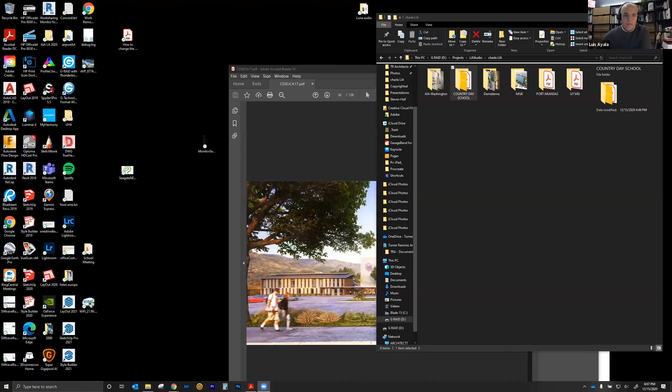Working in Paraguay as an architect is a lot different. In some ways, it's easier than working as an architect here. You have to be a lot more creative. And in other ways, for instance, getting paid is extremely difficult. Nobody wants to pay. That's something that is very wrong in South America, that they don't want to pay for professional services. So there are pros and cons. If I share my screen, I'm going to show you some of the projects to show the difference. Hopefully you can see my screen now, right?

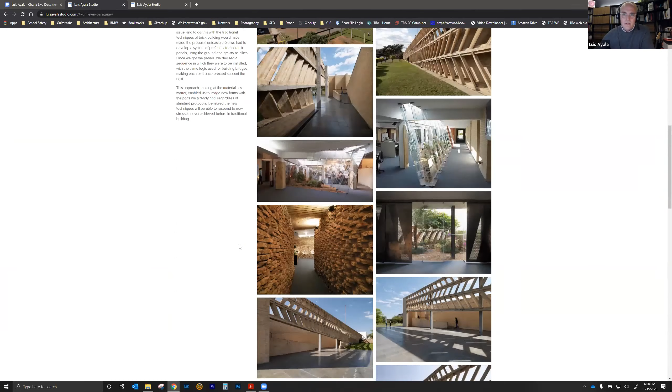Can you? So for instance, this is a project, and I want to start emphasizing that architecture is a work that you do with a lot of people, unless it's a very small project and you can do it by yourself. I have always been lucky to be working with excellent teams all my life. In this case, it was Gabinete de Arquitectura with Solano Benitez, Alberto Marinoni, and a great team that we had. This was a Unilever headquarters in Villa Elisa, Paraguay, a competition that we won.

But I want to show you some of the things that we went through. The project was about creating a brise-soleil, to create shadow for an existing structure. And this is Solano, and this is me when I had hair back in the days. And you see that these panels were broken. We were trying to create these panels with bricks that were very thin and were collapsing. And then we sat on that bench, Solano, Alberto, and I, trying to figure out how we're going to fix this problem that we created ourselves.

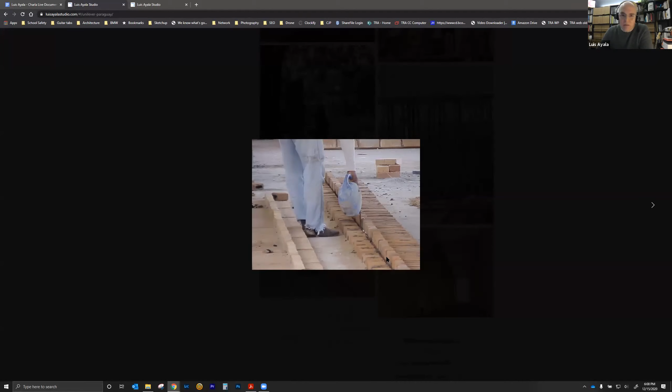So we came up with a simple solution, which is just turning one brick upside down to create a rib on this panel, so they will withstand some weight when we apply forces to them. So these are the workers, and that understanding that Paraguay has a very unique labor force, meaning we have a lot of labor and materials are expensive.

So materials are expensive and labor is very economical, so we can do projects using a lot of labor. And you can check these projects in more detail later on my website, Luis Ayala Studio. But I wanted to show what we did with these panels.

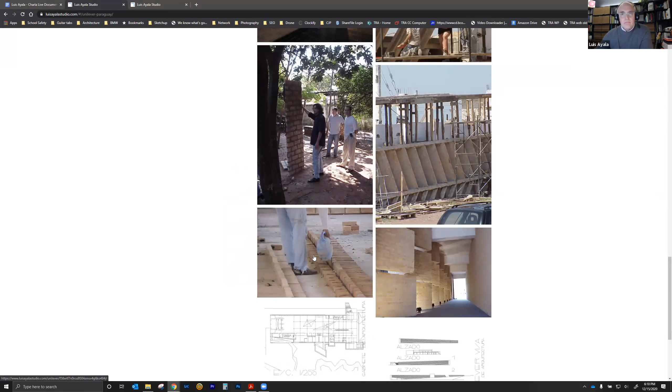If I show the elevation, you see that those panels were supporting themselves. Also, they were load bearing despite the very thin width of that panel. So what I'm trying to say is, try to make this in the US. It's impossible. So that flexibility you have in Paraguay, where the client said this has never been done. And we said, well, we'll take full responsibility for this. And if it fails, it's on us, right? So that's the main difference.

You know how to design in the States. It's different in the sense that you have some systems that are already there. And if you're trying to create a wall, you start thinking of these systems. In Paraguay, we design everything from the systems themselves, right? So that's something I miss of Paraguay, but there are things that I value more here.

And what is the name of this project? I'm sorry, I missed it at the beginning. Unilever headquarters. Unilever is a Dutch company that represents a lot of brands. Yeah. Oh, that's pretty cool that you can just design your own systems, design everything, kind of total design in architecture.

Oh, I remember this is going to be very informal. So we thought about making a script, and I said, nah, let's go with it.

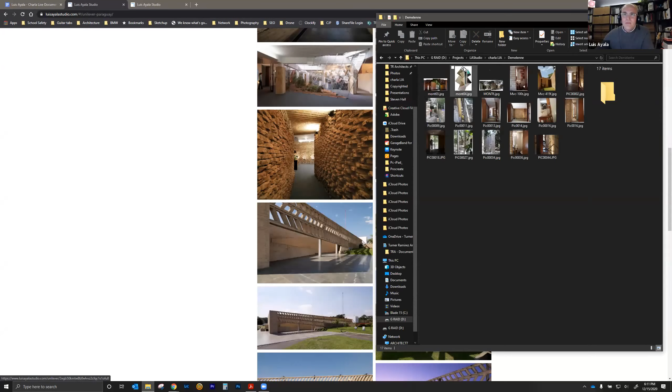So for instance, this is another house, when we were trying to play with it, and sorry, the photos are very small because it was the 90s and the digital cameras were 640 by 480. So this is the exterior wall of a house in Areguá, and Areguá is 50 kilometers away from Asunción, the capital. So we didn't have enough money to build a house.

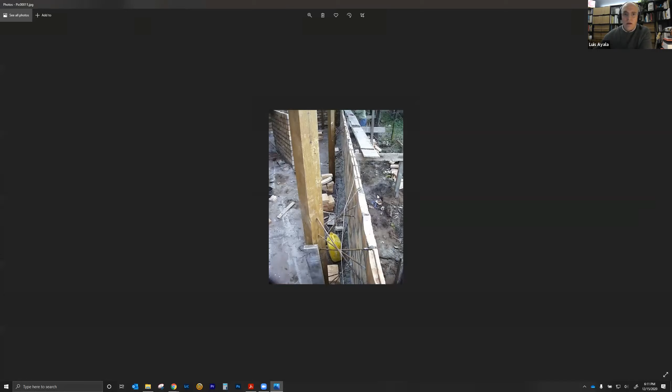So we thought if we simplify the walls and make them thinner and use a third of the material, because when you turn the brick upside down like this, you're using a lot less material, you can make it economical, right? But then you were presented with problems like, okay, a wall this thin is not going to stand by itself. So we came up with the idea of having these wood columns with some rebars tying down the walls. And this is how the house looks at the end.

Of course, when you think of walls that are single wide and this thin, all the heat that they receive, they transmit inside. So we were able to do it because it was in a very heavily wooded area where the trees were providing the shade that we needed for these walls. So, examples like this.

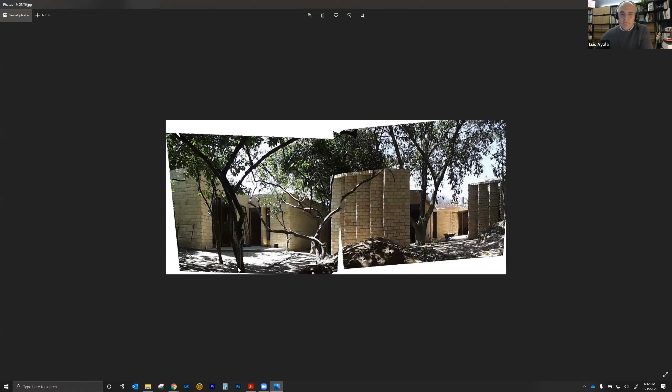When I was working over there, I enjoyed the experimentation, that we were able to experiment doing things that were never done, and we were the builders too. So that's something that is also different, it's always a design-build practice. You come up with these crazy ideas and then you have to build it. So it's interesting. And it looks like it's all passive design. Yeah.

Well, thank you for sharing those beautiful projects with us. Thank you, Ulises. Yeah, so on to the next question. Some of our attendees are students, and we'd like to know what has been your most useful or favorite skill that you learned during your architectural education.

Ooh, nice, good question. I'm thinking of several things. The first one that came to mind was, if I show you the projects that I did in first year and second year of architecture, they sucked. They were horrible, because you learn by doing it, right? And I remember the professors that I had in the Catholic University, but more specifically, I remember my friend.

We went to elementary, middle, high school together, and then we went to architecture school, Sergio Rogero. So Sergio taught me how to think in architecture. We started when we tried to do one of my projects, and he comes from a family of architects, so he told me how they work on projects and how to structure your ideas, to simplify the problem in order to be able to find a solution to design a building.

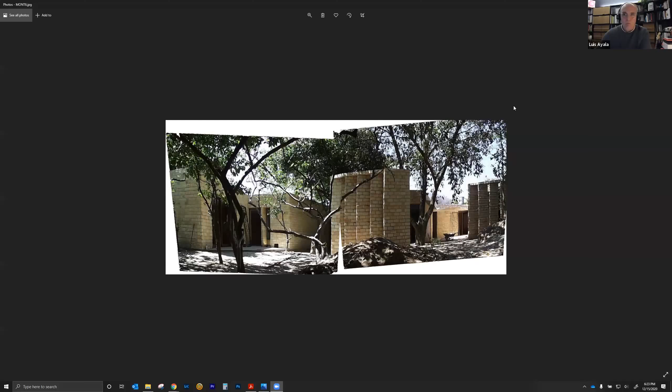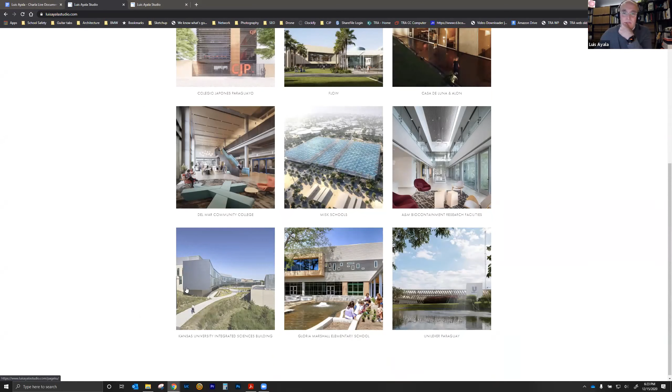Speaking about your work, what was your experience like designing a project that was recognized and exhibited by the Emerging Voices and the AIA National Emerging Professionals in Washington? Okay, I'll share my screen again. This is something I have to thank SHW Group for. When I joined them, we had the opportunity of doing this project. And I remember vividly my friend Jody got this project from this client, Jody Sergi. She was Jody Henry at that time.

The client was thinking outside the box, and I think we were the right firm to do that. It was an elementary school, this district in Spring, and they used to do elementary schools in one story. The first goal was, let's make it a two-story building, and they were cool with that. They wanted a green building when green wasn't in vogue yet. LEED was starting. This was 2009, I think. No, we started building in 2008 when the economy went down. So the opportunity was huge.

And the design director I was working with, Tracy Ike, we worked together really well. I miss that guy so much. I had the opportunity of thinking outside the box, and they wanted that out of me, to bring that South American way of designing to this project. It was very well received. It won the first AIA Design Award for our firm. The same year, it won the TASA Caudill Award, the education award in Texas, and then the Green School Award by the USGBC. So it was a very cool project.

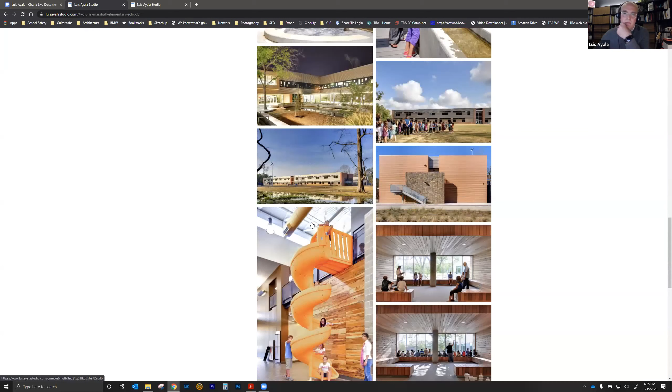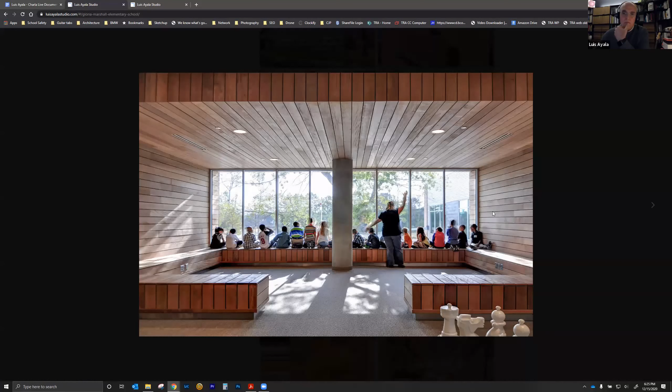I mean, you can go and look at it. It's a beautiful project. What I'm most proud of is that one of the problems we had in that district was low attendance. It's a poor neighborhood, and kids live with their parents, but their parents are usually working, and they leave their children to go to school by themselves, and sometimes they don't want to go and they don't show up. So the attendance was very low in the district.

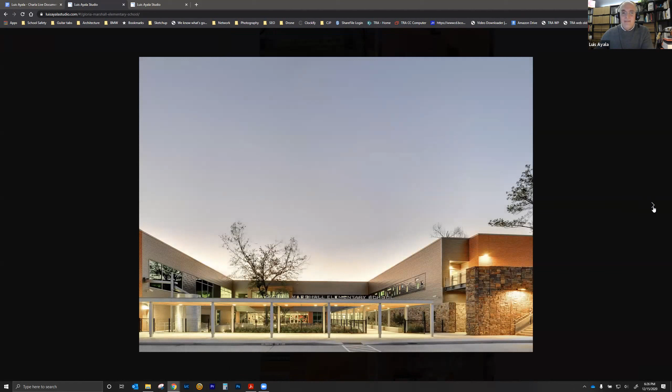And when we did this building, because of how it looks and because they loved being there, the attendance was 100%. So that for us was a great success. I remember with SHW Group, we used to practice the first day of school. We would go to the school and open the doors to the students and show them their building the first time they were introduced to it. And it was very emotional because some of them were asking, is this for me? They couldn't believe it. And for us architects, that is the best reward you can get, that your clients love your work.

So when that building won so many recognitions and awards, there was an opportunity with Architecture Houston to present at what was the Young Architect Forum. They pushed me to present there and show my work, and it was selected among the people that presented. And then without me knowing, AIA Houston submitted this to AIA National, and it was recognized there in Washington.

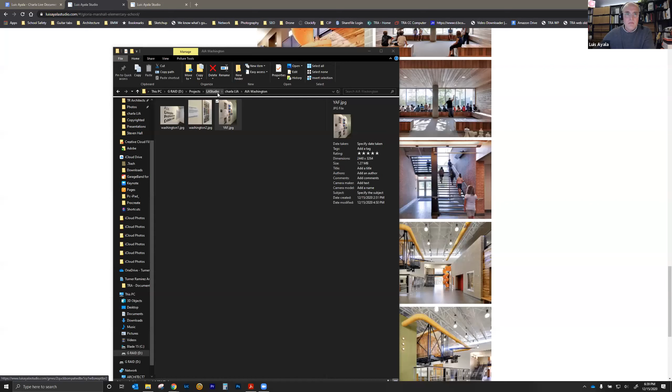So, what advice would you give to someone pursuing a career in sustainable design? Oh, nice. You know what I learned, Ulises, is that I was not an expert in sustainable architecture. Although when I did that house, I'm going to start sharing my screen again, Casa de Luna, that was one of my first projects in Paraguay, and that was even before LEED. So if I go back here. Where is Casa de Luna here?

And it's called Casa de Luna y Alon because my daughter is Luna and my son is Alon. And so we did this house for them actually. So my role here was architect, owner's husband. That is very important to note. I don't know if my wife ever realized that this is my role in this project.

For instance, in this case, think about this, Ulises. When you go to the beach and you're trying to protect yourself from the sun, you use an umbrella, right? And you keep moving the umbrella to shelter you and give you shade. And it's the same case with our buildings. If we just expose them and leave them there naked trying to deal with the sun, then they're not going to be comfortable buildings to live in, and the energy bill is going to be crazy, because that's what we did in the 70s and 80s, because the energy was so cheap,

This is a project I did with Gensler, and last time it won an award in AIA Los Angeles. So we were competing. It was a private competition for the Prince of Saudi Arabia, and his wife runs a school, the Misk School, and Misk in Arabic means the dew, Rocío. I think in English it is dew. Like mist? Mist, exactly.

So what I wanted to show you of this project is the tools that we have to work with now to think about sustainable design. So let me get there.

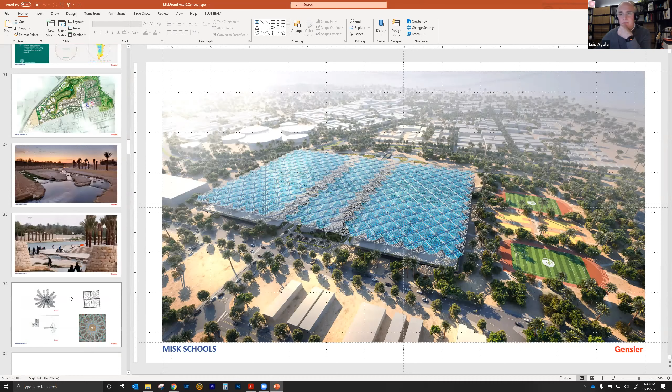Okay, so how are we with time? I think we have to be wrapping up.

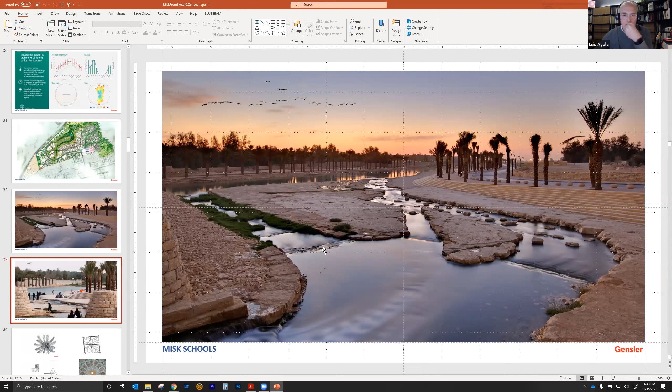But this is in Riyadh, this is a wadi, and wadi means a little river. And a lot of people go here because the water brings the temperature down. And the only tree that grows in this area are these date palms. So when I started with the concept, and I promise I will get to the sustainable question here.

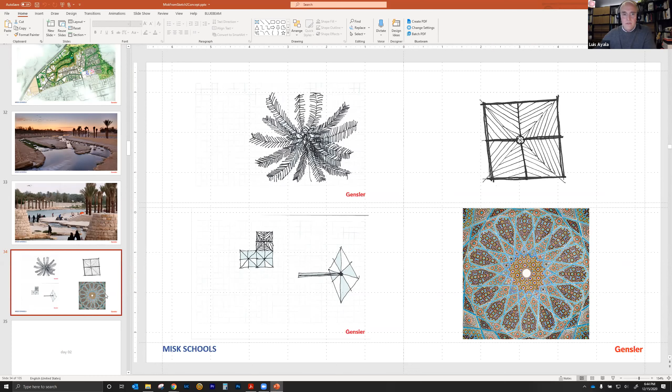When I started with the concept, I thought, if what they are using here to shade themselves are date palms, they don't provide a lot of shade. But if you combine these leaves, if you multiply them, now they create some shade. So I started thinking of how can I create a canopy using the date palm as a pattern, and using also these Arabic architecture patterns that they have a lot.

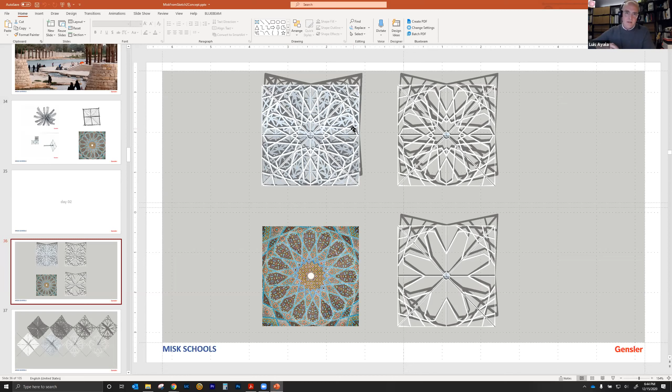So this is an exercise of modeling fast in SketchUp, because it was a competition, a paid competition, but they gave us 15 days to come up with a solution for the school. Oh, wow. So I started playing with these ideas of the date palm that I rotated in the same axis, trying to create more shadows, and then to see the density of these shading devices,

how they were going to shade the spaces. Then this is a scale of a person. When working in a desert environment, to create shade is everything. So we were going to multiply this by having thousands of these date palm structures.

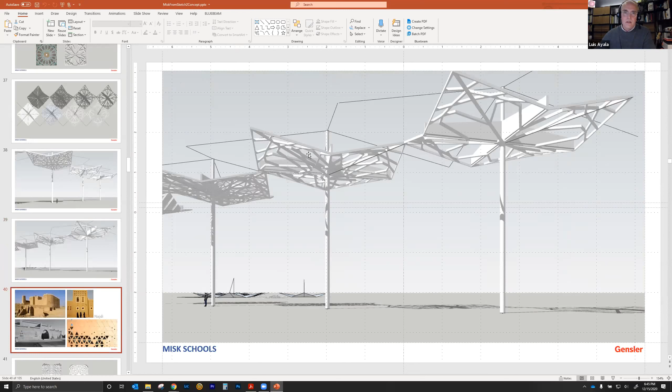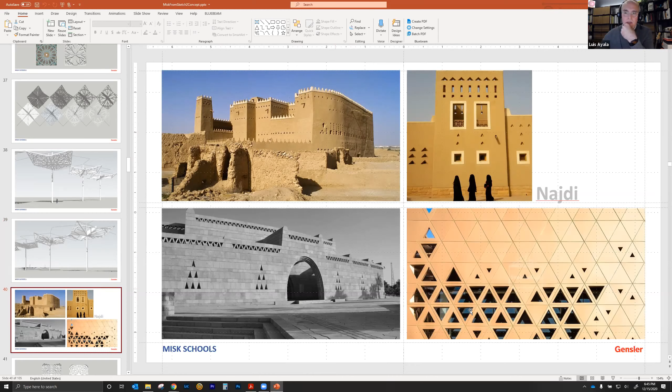They also asked us to design using the Najdi architecture, and Najdi means when they created their fortifications, in order to create windows, they placed one brick next to the other, creating a triangle effect, because it was the most efficient way of creating a window in a very solid adobe wall. So this triangle idea on the windows came up also in modern architecture, representing what is Najdi.

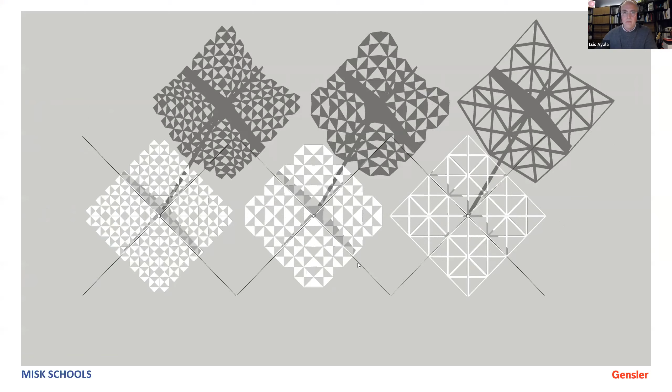So applying that idea to our, it would be better if I make this bigger, to our canopies, we came up with several ideas. Notice when they move these palms, and I was researching this, and this is something that also helps us as architects, and I encourage you to do that as students. Be very curious about your environment and what's happening.

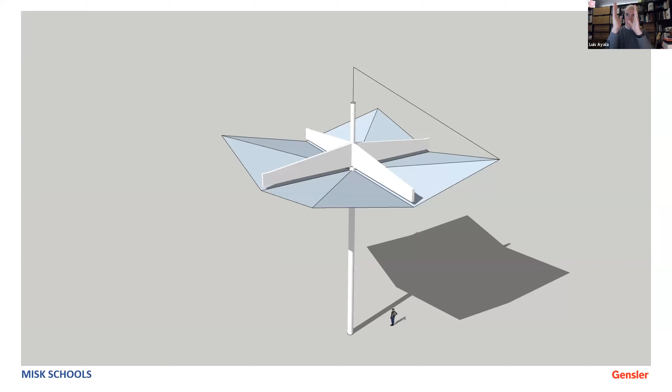So I noticed that this tree has the leaves up like that, and I started asking why. Were they trying to trim it? And the answer from one of the natives over there was no, they just moved that plant. And when they move it in a truck, they put the leaves up and they tie it up. So we came up with the idea that we can do the same with our canopy, right? When we need to exhaust hot air or bring more light, we can open it up.

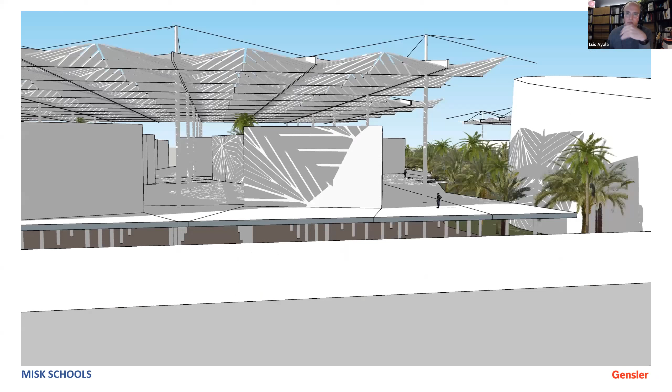We started thinking of the building having a parking garage, the school in the middle level to take advantage of the wind, and then creating a shading device on top. And this is showing how the shade changes when the sun is moving. I'm not going to go through the program, but this is where I wanted to get.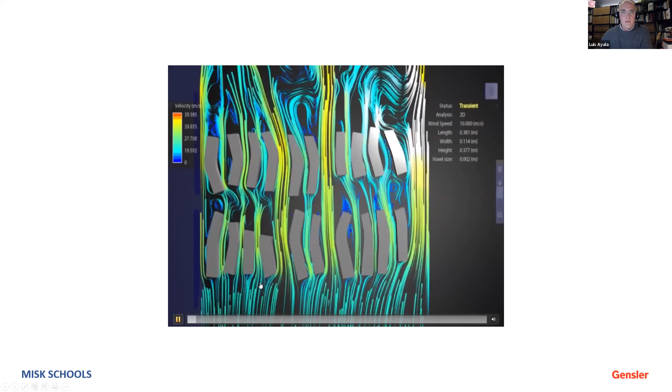With the tools that we have, I ran this model in a wind tunnel, and I'm not an expert in flow design, but you can do trial and error. You can try your model to see when it's working. And what we were trying to do is to minimize the hot wind that we had, but to keep breezes,

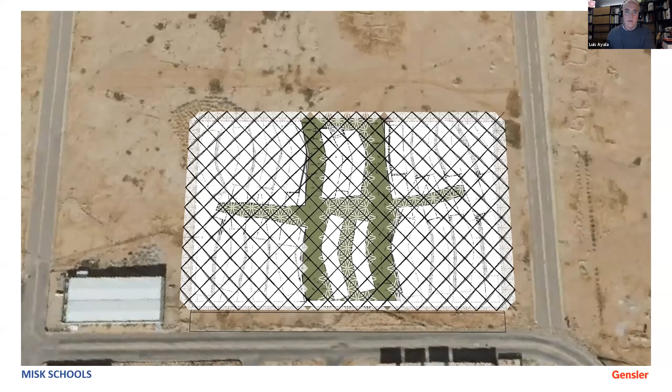just some breezes. And you see here in the center, we were trying to create a space where students are going to be spending most of their time. We wanted to be able to control that wind and to provide the right amount of breezes that will make it bearable. So then we started, and I'm counting the days.

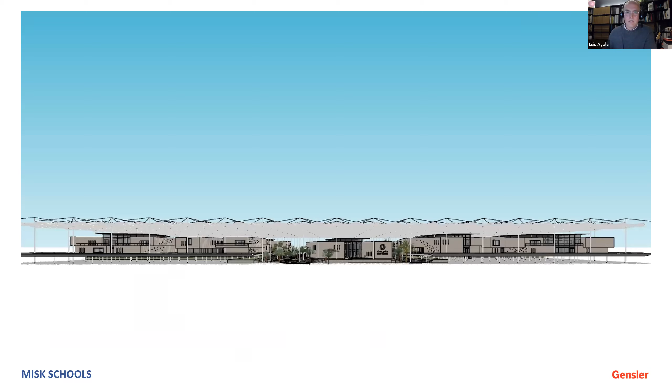This was a presentation showing how we evolved the project in 15 days.

This was the first time I killed a mouse working on modeling. I usually use Logitech mice, like this one.

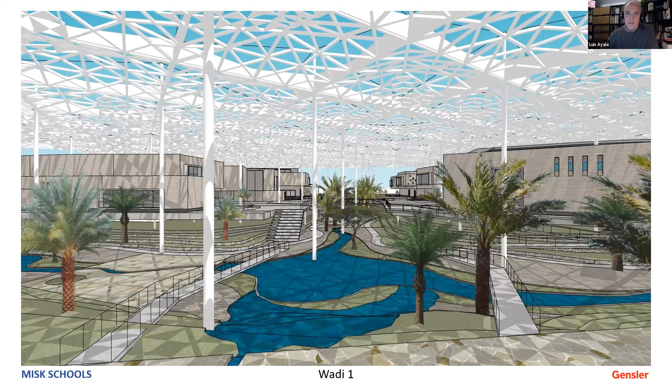And I modeled so much in 2 weeks over there in California that my mouse died. The left click button died. It ceased to work. I modeled all of this by myself. When I got to California, I was like, okay, perfect. Who is my team? And they all look at me. You are the team. Shit. So I have to come out, I have to design and model it. Yeah, but honestly, I had a team behind doing everything else that was not design related. So I'm just joking.

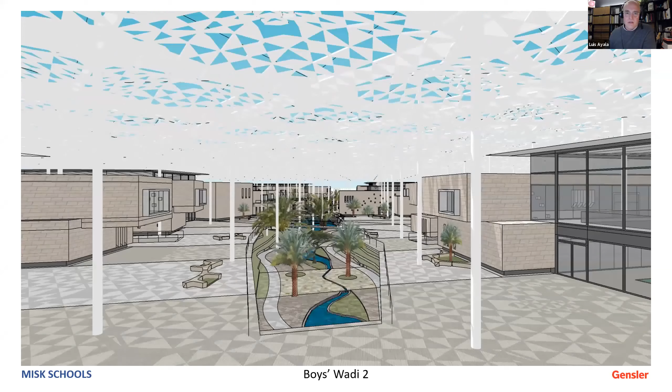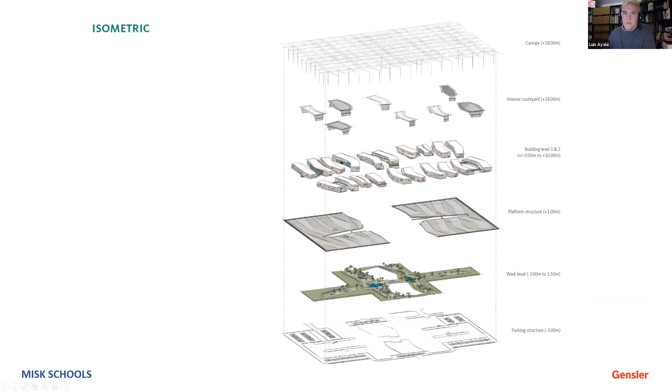So day 14, this is what we got. The parking garage here, the structures, 2 stories here, and a shading tool there. So going back to the question of sustainable architecture, if you think of our conditions here was a hot climate, we had to elevate ourselves to be able to take the wind that comes with a lot of sand at that height by elevating ourselves, lowering the temperature by creating shade, introducing water inside of the space.

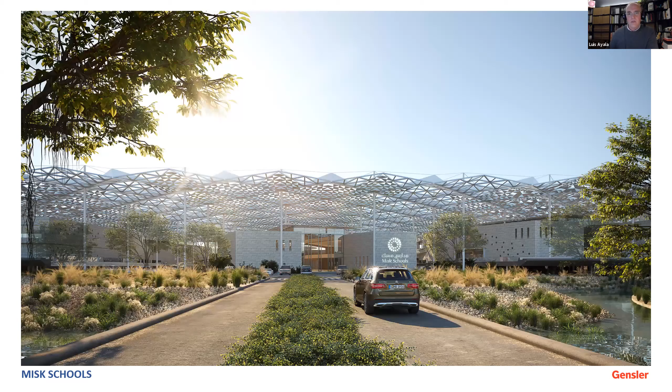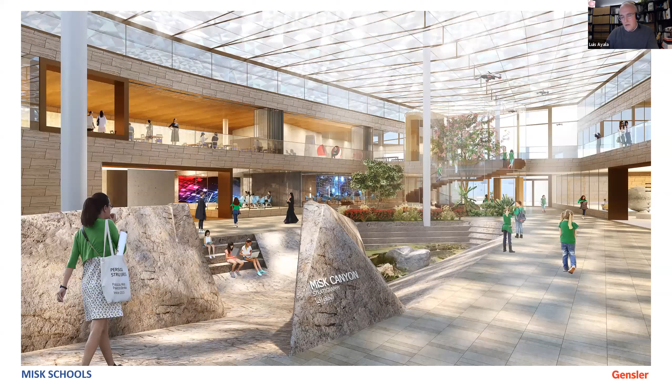That created this space like an oasis. And that might be a cliche, but in the desert, you want to find an oasis, right? So we were doing that by the mist that this was creating. The purpose was to lower the temperature and to make it bearable to use a courtyard in the Arabic weather. And that's what they usually do. Studying the way they do architecture, usually they create these small courtyards and try to cope with the weather like that.

So, going back to your question, is to be curious, to try to find a solution. Think of the building as when you go to the beach and usually you want to put something to protect your skin when the sun is too hot, or you use an umbrella. So our buildings are the same thing. I'm simplifying it a lot, and then the tools that we have. Okay, I think I'm extending myself.

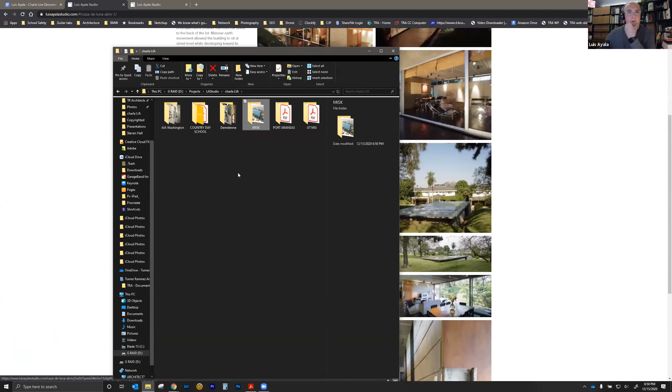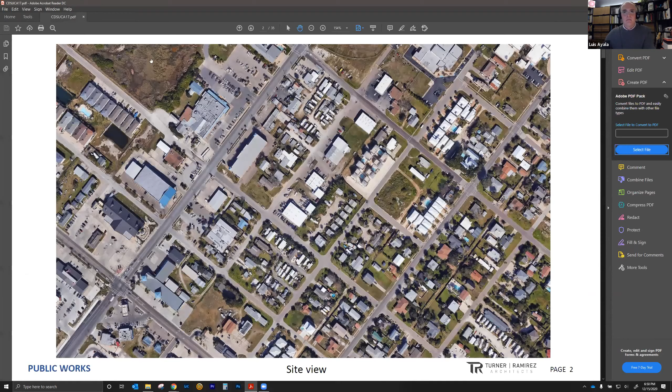Let me show you something else, because this is a very cool tool that I found recently. I'm working with Turner Ramirez Architects in Corpus Christi, and we're doing a very cool building for UTMSI. So that's University of Texas, and MSI is... Oh, this is not the project I wanted to show. Sorry about that. This is Port Aransas. UTMSI is this one. Okay, so this is a dorm.

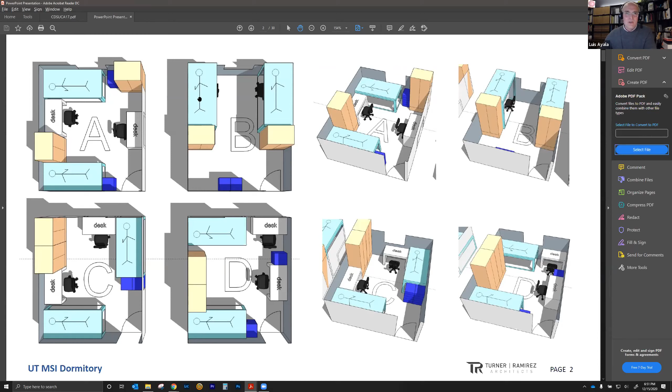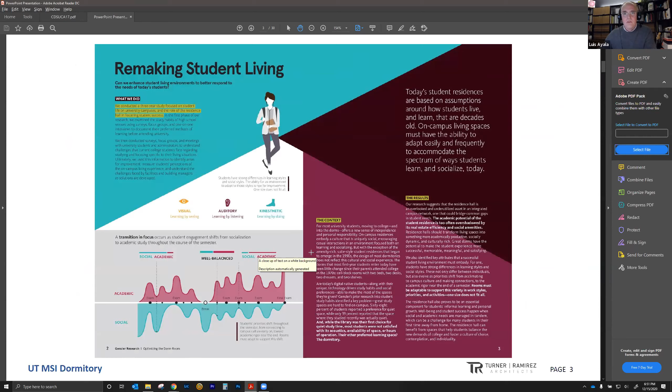When my daughter moved to college, she sent me the layout of her room, and she wanted, can you study in SketchUp several ways to come up with locations for the bed? So on purpose, I drew her very thin like that, a stick figure, and tried to come up with several. So there are studies like this. This is a study that Gensler did about remaking student living, and we started thinking of ways of making our dorms a little bit more interesting.

But I came up with this portion of the design where I wanted to do this overhang to the building. This is a dorm, very simple. It's elevated over the dunes in Port Aransas, and the views to the coast are beautiful. So the MSI is Marine Science Institute of University of Texas. So these students are going there to research marine science. So I was showing this to a couple of scientists that are our clients.

So I showed them that if we have this overhang, the sun protection on the face of this is almost optimal. You see, this is showing that it's less than 20% of the annual exposure. And I'm using a plugin over SketchUp that is called Curic Sun, C-U-R-I-C, Curic Sun. It's free, and it lets you analyze this, right?

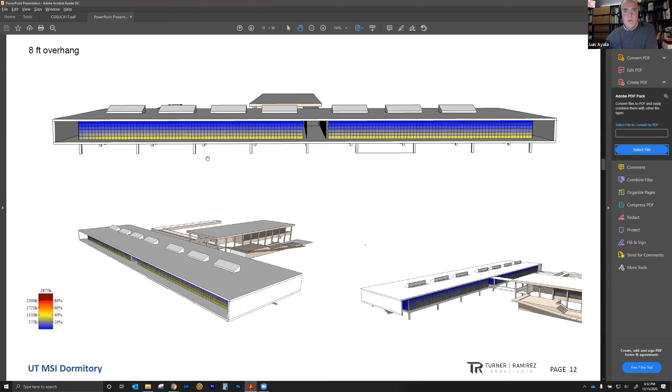So if my overhang was a little bit smaller, 8 feet overhang, I was having some light on the bottom. If I keep reducing my overhang to make the building more economical, at 6 foot, I have a lot more exposure. 2 feet, it starts to show orange, and 0 feet overhang. This is what a builder will say, why are you wasting your money doing that overhang that is not helping anyone, right?

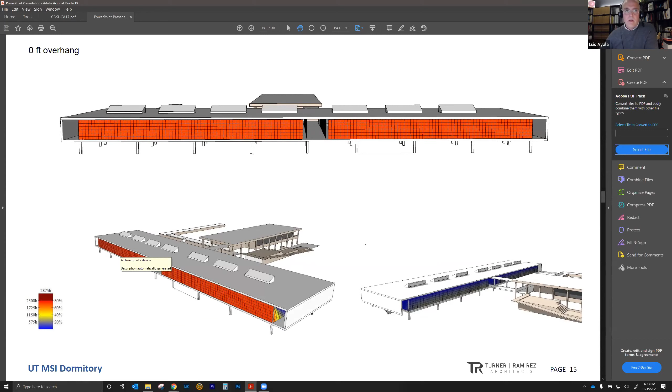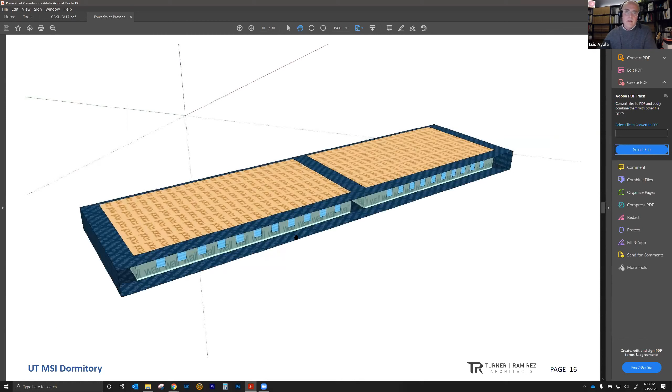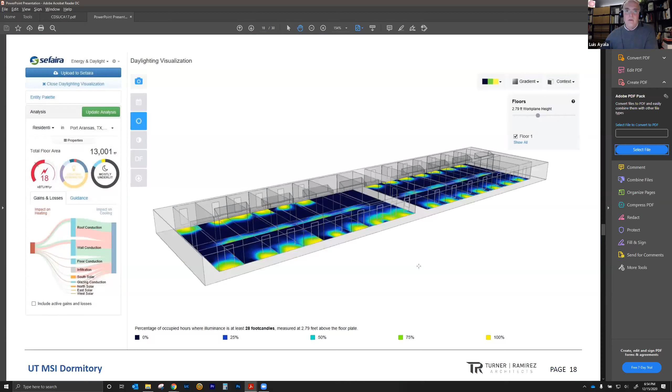And then this is Sefaira also running over SketchUp, where you can assign the surfaces, if they are wall, if they are roof, and then it will give you your annual energy consumption analysis. This is plug and play. You can change the size of the windows and see the daylighting. So I'm enamored by using these tools that show you the real effect on a building and how much your energy bill will be.

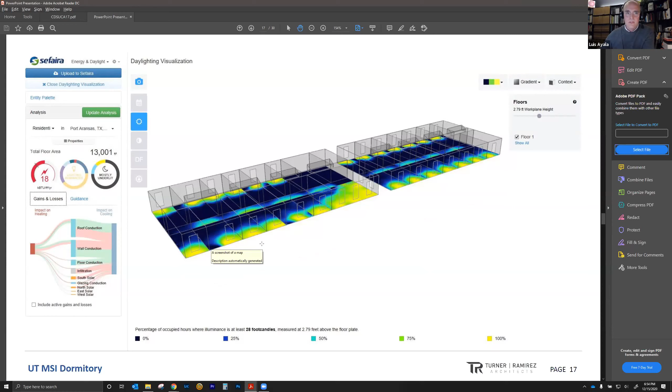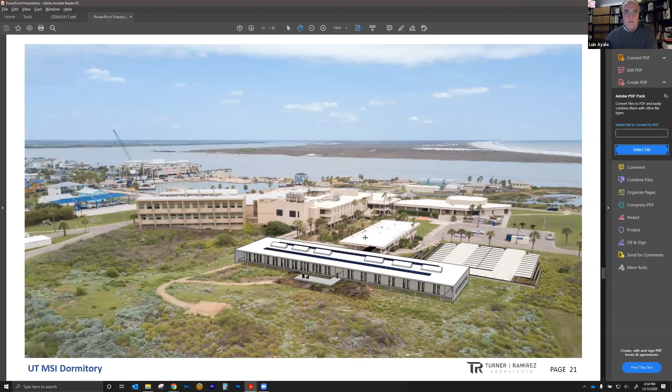No, 13,000 was my area, but it was telling me the kBTU per year, and that translates into money. So if you show this to the client, the tools are accessible to us, and we show them that they're saving money by doing the design that we're proposing. I don't know a client that will tell you, no, that's stupid. You're showing them the science, and they like the design, and it's like, yeah, go for it. And that was the situation with this client, and we're going to be building it.

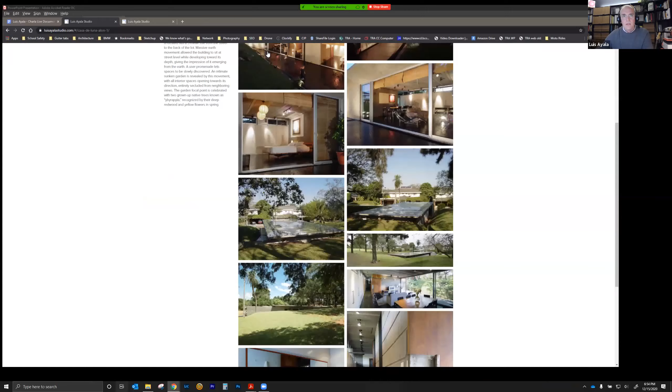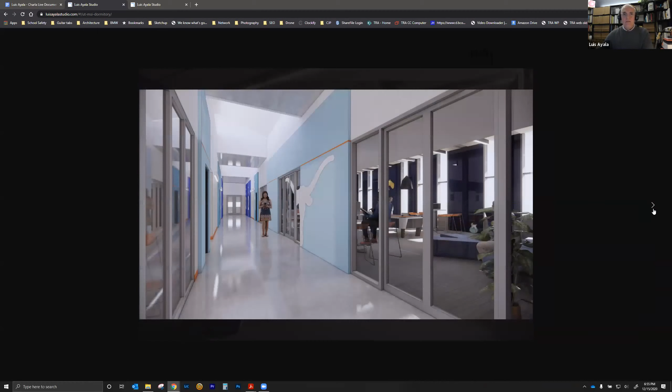But the final images are here. UTMSI. It's a very cool building, a simple building. So I hope that answered your question. Use your tools, know the tools that are available to us. What I usually do when I start a project from scratch is: where is the sun coming, where is the wind coming, what is the temperature, and how can I help this building cope with the environment? When I have all of those layers stacked, I know what I have to do. The solution will show itself when you know all the problems.

Sorry. Yeah. Thank you. That was very good advice. Very, very good. No problem. Are we done? No, I was just gonna say that we're not done with school yet, and I want to start the next semester already. Yeah, you've inspired us. Cool. Well, thank you for answering our questions.

I know we have some questions from the participants. So the first one's from Maria. She asked, would you come to Paraguay to work if you had a chance to do a project? I am working in Paraguay too. Last October, a private school hired me to do a project in Paraguay, and I think they're going to start construction in March.